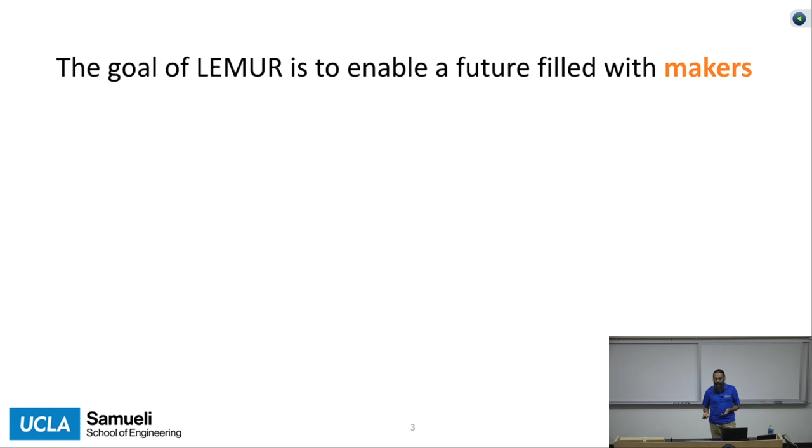We are an engineering lab, we have to do engineering research. So we talk about a bunch of specific topics that span electrical, mechanical, chemical, material science, all this stuff. We talk about the brains of robots, we talk about their behaviors, but we mostly talk about building them, designing them. That's really what the focus of my talk today is going to be: what does it take to design, to build, to create?

I have plenty of work on other stuff that I'm just not going to talk about, but if you want to hear more, feel free to contact me afterwards, stay around, throw me some questions, whatever it may be. The goal of everything we do is to make people more able to design and engineer their own solutions for whatever their problems may be.

I'll use the words robot and robotics interchangeably with engineering, creation, and making, not because I feel like robots are the only things worth making, but really nothing else is worth making. Robots are cool, they're fun, they're interactive, and really everything you could make is kind of a robot. What is a robot? It has some structure, it has some functionality. Whatever you make, we'll just call it a robot, and that way I can call myself a roboticist and do whatever the heck I want. So don't be limited into thinking about the robot as any particular kind of thing, and we'll see a whole bunch of different robots over the course of the day.

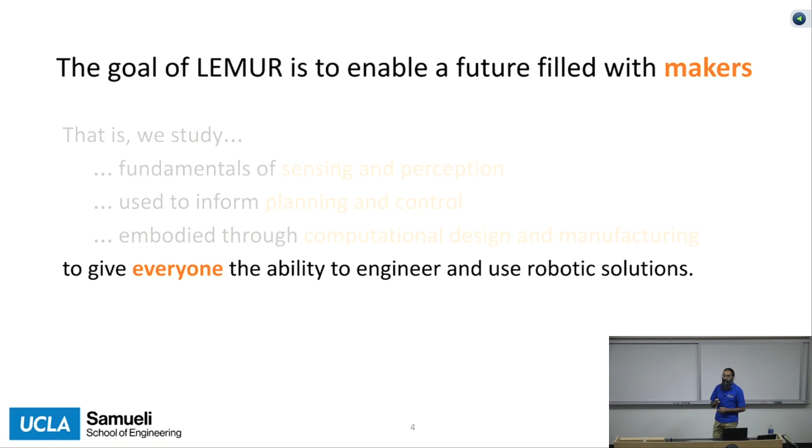But like I said, I'm going to start with that motivation. Why are we building robots? Why are we designing robots? And in fact, why in our group are we not actually designing and building the robots ourselves? Why are we coming up with solutions that help other people build robots?

Now I'm going to go into a bunch of social science research results that I did not create. I cherry-picked a whole bunch of data from the world around me. I'm also not a social scientist, so I take this information and put my own spin on it. I'm going to make a bunch of opinion claims, and they may or may not hold water for any of you all individually.

I encourage you to take a look at the data, which is numbers, and make your own inferences from them. But I'll start with a few snapshots of money. As much as it pains me to admit, we are in a capitalist society, and so money is kind of the core of everything.

We can take a look at the gap between the people who have and the people who don't have, and how far apart they are. We can think about their income gap, like how much they make on a per time basis, or if we're engineers, we can integrate it and think about a wealth gap, how much you have aggregated overall. The fact of the matter is those who have are having more, and those who have not are having less. In fact, many people have less than nothing.

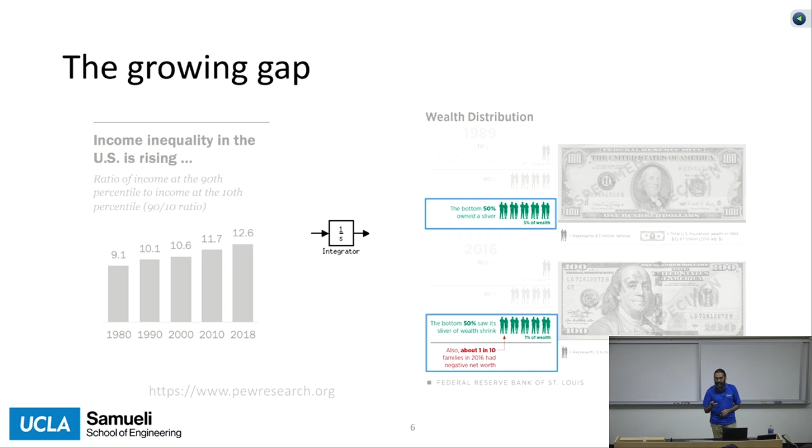And this is an issue. Why is this an issue? It turns out resources in a capitalist world map to money, and money maps to resources. One very important resource is technology. We can see this gap about who has access to what, like broadband, laptops, connectivity, all that sort of stuff. That's all well and good, but now access to technology has further follow-on consequences because that resource translates to education. We are all in a room filled with computers and monitors and stuff.

You have plenty of interactivity in your courses and your education, not only here but leading up to here. We can see some of these graphs, broken down by various demographics. The main takeaway behind these is not so much the demographic information itself, but how that is used to correlate access to technology to access to education.

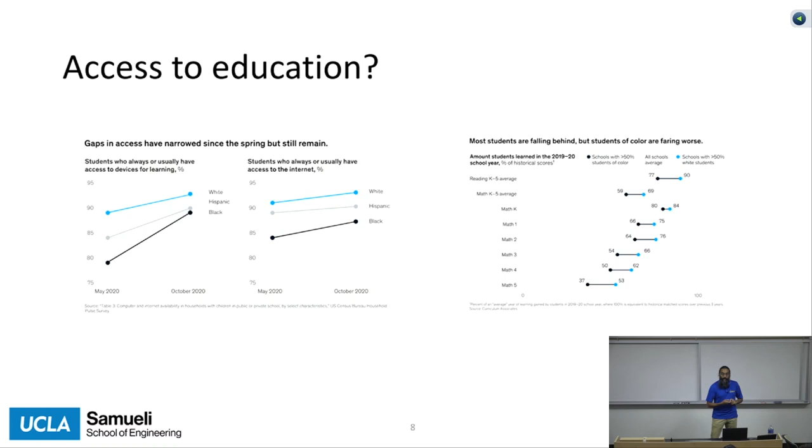So having less access to technology translates to not having the same level of outcome from an educational program, from your schooling. And things keep going from there. If you don't have access to education, that compounds. Then, not having sufficient education translates to the next generation having less resources.

This is sort of like the map from when we had a way of doing a very careful comparative study of the capabilities of education before the pandemic to the capabilities of education during the pandemic, which were drastically reduced, all else being equal. So we can see some of these trends across time.

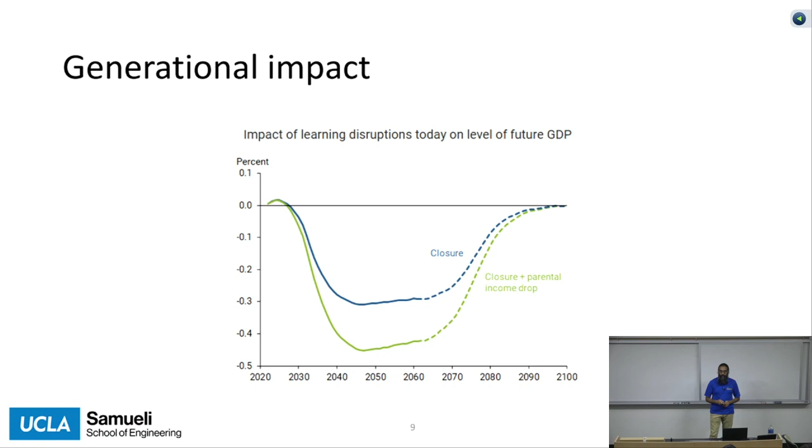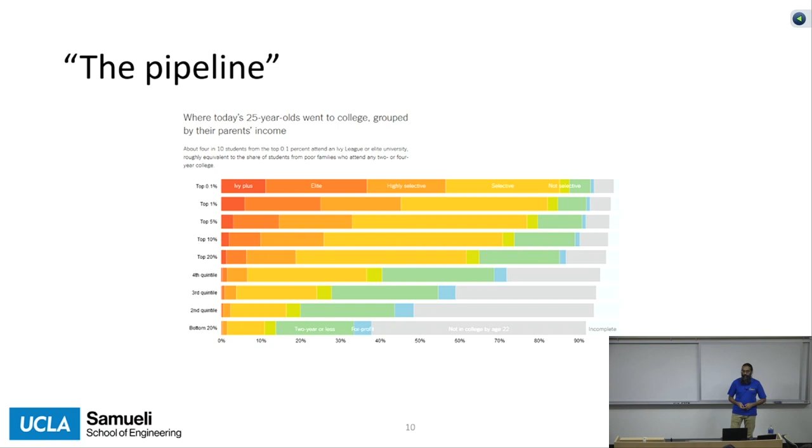And it keeps going, right? There's this idea of the pipeline, but really that translates to more education, more money, more education for the next generation. You can see how the parents' level of resource translates to kids' level of education. So we have this feedback loop.

And it's a positive feedback loop, where the word positive is again used in an engineering sense, where when you have a feedback loop with positive feedback, the signal rails out. We have this increasing separation between the haves and the have-nots. And that sucks. That's not great.

So I'll say, before I give my take on how I may try to approach this, it gets just a little bit worse in that this problem, this mapping to educational resources, and then the feedback cycle starts early. We can look at not only access to education, but then engagement in that education as well, in terms of truancy, the participation in the school process.

This mapping is very strongly correlated with income, with the resources, and it starts early. It sort of continues on. Lower education now translates to lower income later, and it starts early, as early as kindergarten. Now, I'm not going to say there's a very clear causal relationship from one to the next. There's a lot of confounding factors where there's a common origin that leads to many of these together, but nonetheless, it all comes together to see this compounding loop.

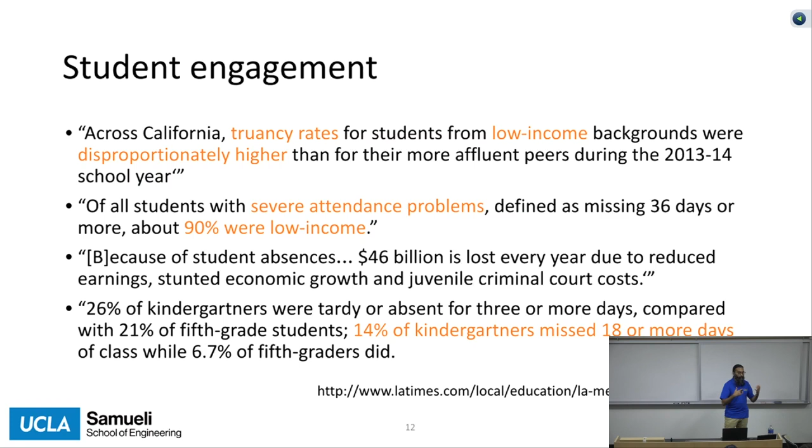And so that is kind of a dire picture. This is sort of the core of my motivation, in that I look at that and say, how can I, an engineer, go ahead and start addressing some of this? There's certainly better ways of addressing, or more comprehensive ways of addressing it through policy, through economics, through outreach, and so on.

But as an engineer, I can take a look at this one component of the feedback loop and say, mapping resources to educational capabilities, can I try to make education lower resource intensive? Can we think about what it takes to learn about engineering right now, learn about making, learn about creation, and make that more accessible to more people?

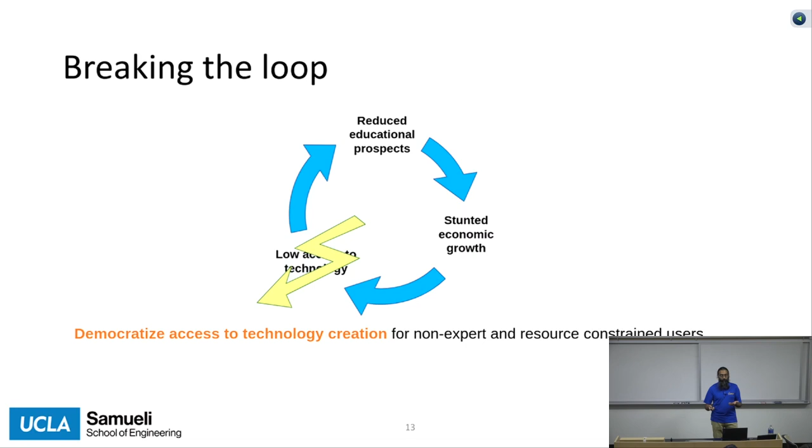I'm using engineering and robotics as a catch-all to relate to general creation, and in fact it translates down to agency. If you feel like you can do something, if you can make your own impact, maybe that'll give you the ideas or the support necessary to go on and continue with a long, productive, and happy life.

This is the broad principle. It's known in many terms. One aspect of it is this idea of the endowment effect, which is when you've created something yourself, you give it more value. You have a better connection to it, and so this idea of making translates into having a better sense of self. That's how I put all this together to say that my motivation comes from there.

But it turns out that's not the only value to the research that I do. Starting from that as the motivating goal for me, we also end up with some of the more traditional engineering metrics of performance and value. For that, I'll turn to a common approach throughout engineering, this idea of trade-offs, a Pareto front.

You can look at any two axes and say there's a trade-off between them. I took this slide from one of my colleagues' papers where they were looking at this concept of fairness. I can look at it broadly as equity or access against whatever other performance metrics we have, speed or energy efficiency or power, or whatever you want to talk about in terms of engineering performance.

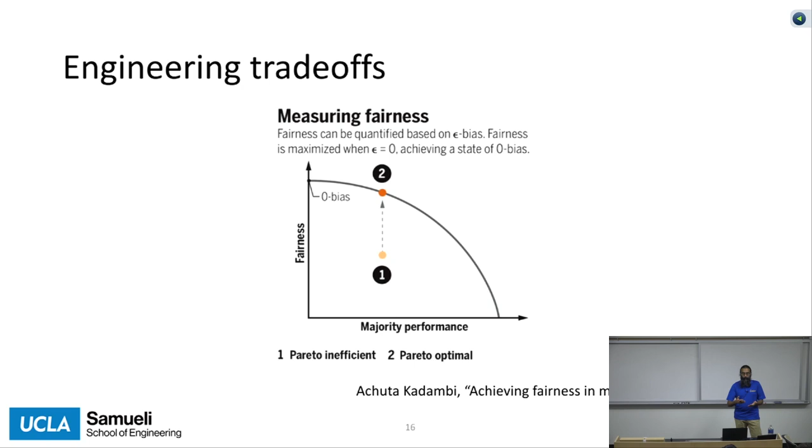Oh, and I thought I had a nice animation here, but it disappeared. The idea is that as we do engineering, we push that Pareto curve out. We increase the overall trade-off space. So if we focus on increasing equity and access, then whatever developments we come up with are probably going to improve these other performance metrics as well.

Another way to look at that is, I'm an avid GNU Linux user, and I look at the philosophy of Unix, which kicked this all off. The idea is you have individual things. You have one thing, you do it well. In the world of robotics, we've seen a lot of examples of trying to do everything.

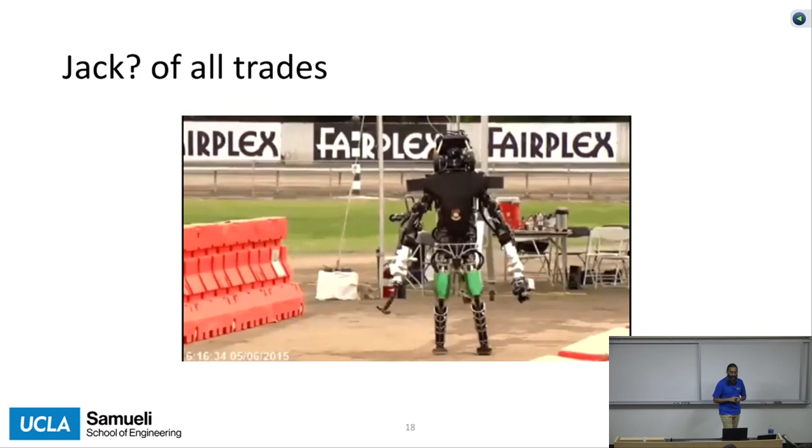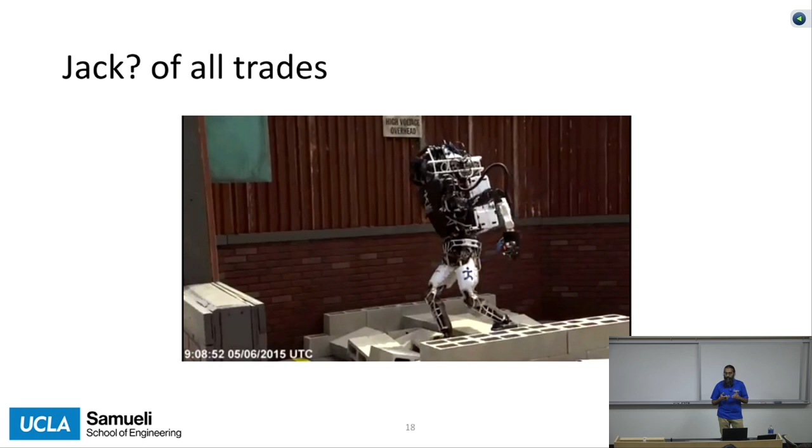Here's a video from the DARPA Robotics Challenge. It's a little dated now, we're coming up on a decade, but I don't think the right lessons have been learned from this, because we look at all these failures and the takeaway is, well, we need to get better. And we see people are certainly getting better at building these all-purpose robots. I look at this and say, why should we have a robot be able to both open a door and drive a car at the same time? Sure, we can, but we've had millions of years of evolution to get here. Maybe we should think about having one robot do one thing and do it well.

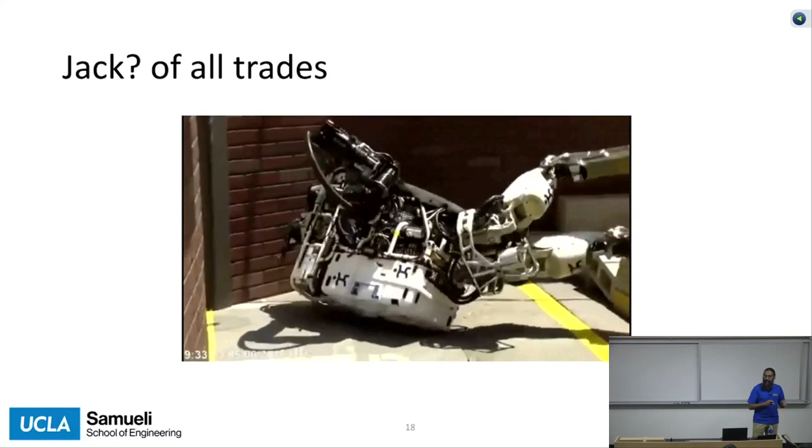Translating this back to my idea of lower resource robots, we can look back at the philosophy of Unix and this idea that part of development, part of improvement, part of getting those performance benefits out includes failure. It includes having some of these failures so that we can learn from it and try early, try often, and fix things when you need to.

Now, when you have a $1 million robot that you're trying to get to do something, you're very hesitant to have it fall over in case you ruin your $1 million investment. But let's say we develop $1 robots. I mean, yeah, $1 is still quite a lot for a large portion of the world's population, but it's a lot less than $1 million. Now you can try all sorts of random things, and you can fail. And if it doesn't work, you can scrap it, learn from it, and try again.

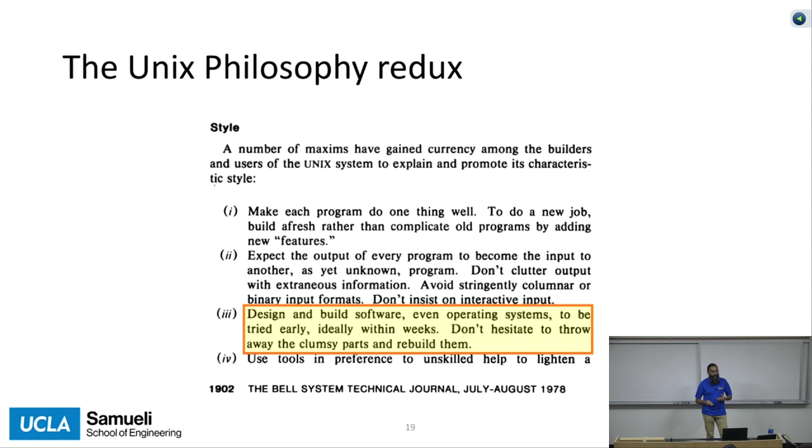So there's a lot of benefits to this idea of lowering the resource investment needed for engineering education. That's the approach that I bring to this, where if we're thinking about getting more people to build stuff, we really need to think about the creation process.

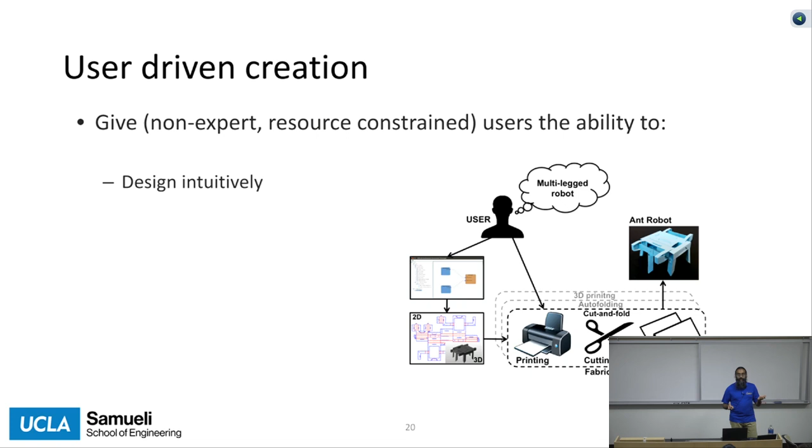Rather than think about it in terms of us, the expert engineers, we want to think about the non-expert user, maybe somebody who has limitations on what they can bring to the table. But we want to give them the same process that we have for engineering. Start with some idea and translate that idea into some intuition of how a solution should work. From there, go ahead and actually manufacture it, build it, turn it into a physical realization. Test it out, see how it works. Make sure it has behaviors associated with it, and have it try to execute the solution.

And learn from that. Whatever happens, you've generated some new insight. Go again. Figure out what you need to change, build a new system, and end up with your own custom creations, your own solutions. Ultimately, we want to put all this together - I'm talking to a crew of people from MRC, but ultimately we want to be talking to everybody. Whoever wants to create, whoever wants to build, whoever wants to design and make should have all the tools available, all the knowledge and all the capabilities to go ahead and do it for themselves.

So I think this is a good time to take a pause. That was sort of my motivation, that was why I'm here, why I'm doing everything. Are there any questions, anything that people want to discuss more, or we can jump into the research?

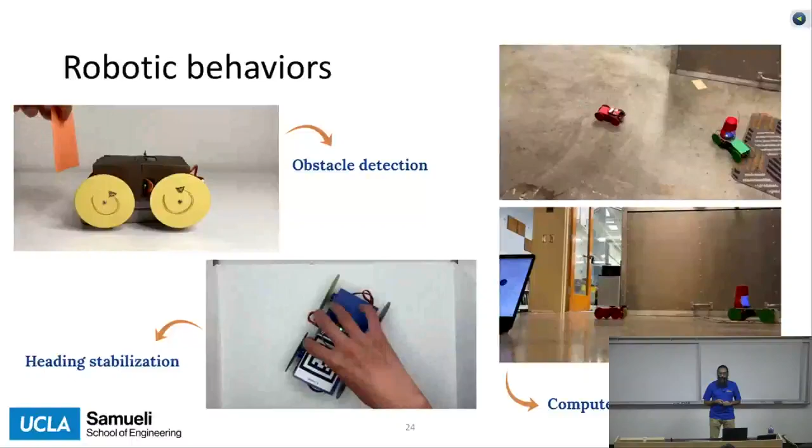So I'll start with an example. These are images and videos taken from the final presentation of a student I had for an 8-week-long internship. This was a student who was a first-year undergrad at a community college nearby, a first-generation college student, not an engineer yet at this time, and created a bunch of these tools, these robots that you see, and the behaviors they're executing. These are things that are fairly well developed, especially for somebody who's only 8 weeks removed from seeing creation for the first time. This is really what I want to get to.

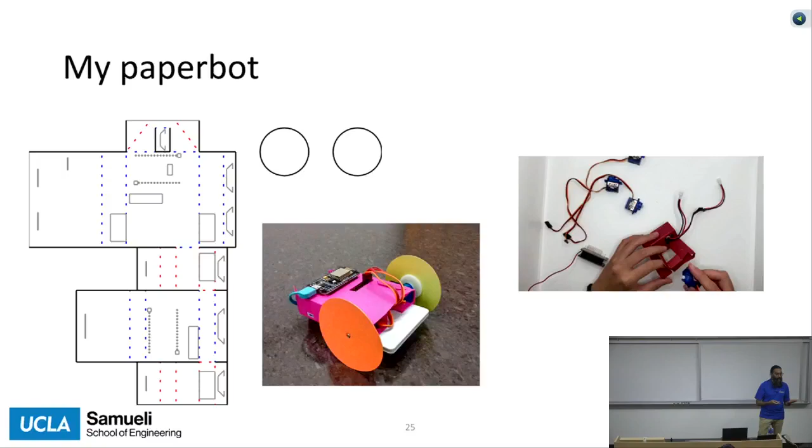How did this happen? I started with this paper-based robot that I designed during my postdoc life, and it's very cheap - I think $10 worth of materials, of which $8 are the batteries. You cut it out of paper, you fold it up, and you have this 2-wheeled vehicle. I give my students, my summer interns, this toy to start with, along with the information for how to design it, build it, and use it, and tell them to go do something else - start from there and do something interesting with it.

So that's where I'm going with this, and I'll go ahead and start going through the steps we've been doing in our lab to make that pipeline a little more accessible. Maybe you don't have to go to a research institution for 8 weeks to make that happen - you can just stay at home, and with whatever you have at home, still become that kind of roboticist.

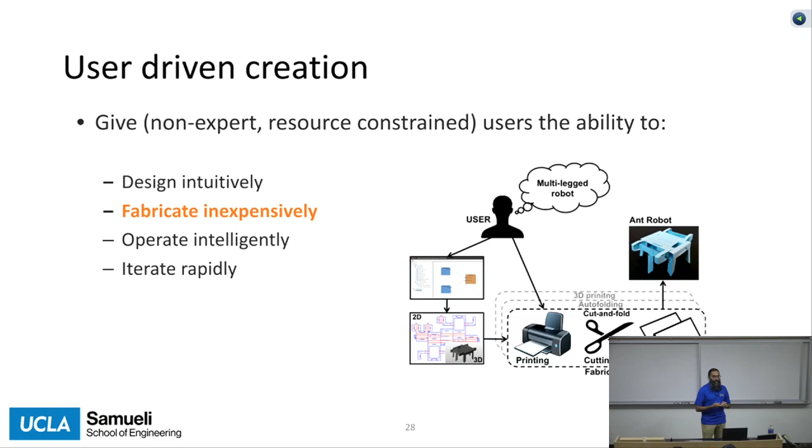So I'll start from the idea of the steps of the creation process, and start at this manufacturing step. We want people to be able to build their ideas, their creations. This idea of user-driven manufacturing - that's the term printability. This is sort of the start of my printable robot life as a postdoc. I built this vehicle where the body was made through this rapid manufacturing process where you cut and fold paper - that's what I called printable at that time. We made the body, and that was huge, because up until now you needed either a machine shop or maybe a 3D printer, but you needed some kind of infrastructure and an established manufacturing pipeline.

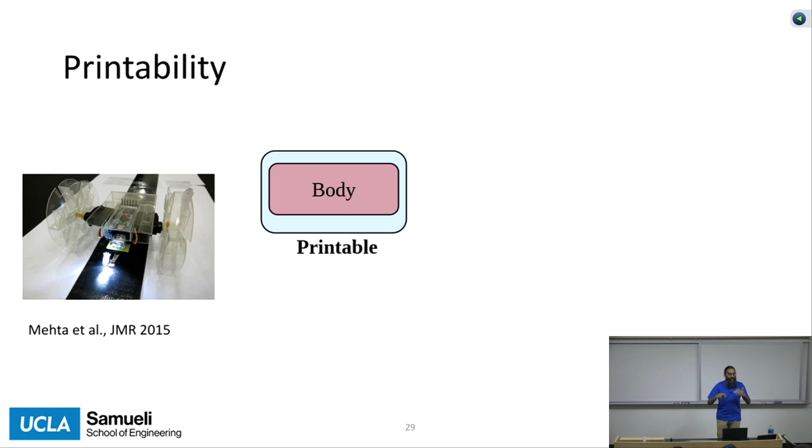Now you can do it with paper and scissors. And so that's the idea of printability. That's where it started. But it turns out a robot is much more than just a body.

There's a lot of other stuff going on. In order to be a robot, you probably need some sensing, some actuation, some intelligence. There's a lot of these other components that are necessary. There's also power. Throughout this entire talk, in fact most of our research world, we haven't really focused on the question of power. Not because it's not important, but mostly because that's a very hard problem that I don't have the background to do. But I think it's very important, and right now we have collaborations for that. If anyone has solutions or can come up with solutions, great. Let's fill out this whole story.

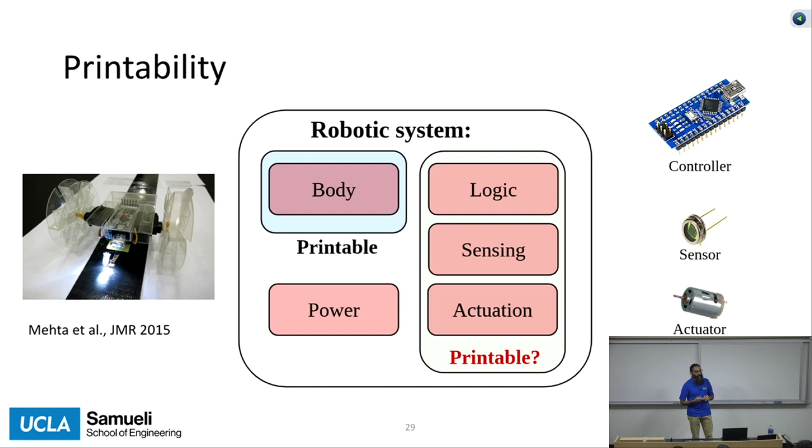But really thinking about just the brains, the intelligence, the rest of the system beyond the body, that wasn't really printable. It wasn't really rapidly manufacturable. I have to go and buy electronics, motors, microcontrollers and so on. Certainly getting a lot cheaper, but still not easily accessible. They're cheap, but you need to live somewhere on an Amazon delivery route to be able to get it, or you need some way of interacting with the broader commerce world.

So drawing a parallel to the first idea: let's start with some smart or capable material. This idea of paper, which I'll use interchangeably with a broad general 2D substrate. Sometimes they're plastic sheets, sometimes fiber, maybe wood sheets. But you have this idea of a 2D material that has interesting mechanical properties, where if you design it the right way, using cut and fold processes, like origami or kirigami, you end up with the ability to customize a solution in the real world, a 3D solution. You can quickly and cheaply manufacture things with the right mechanical or interactive dynamic properties. That was the ability we created with printable bodies.

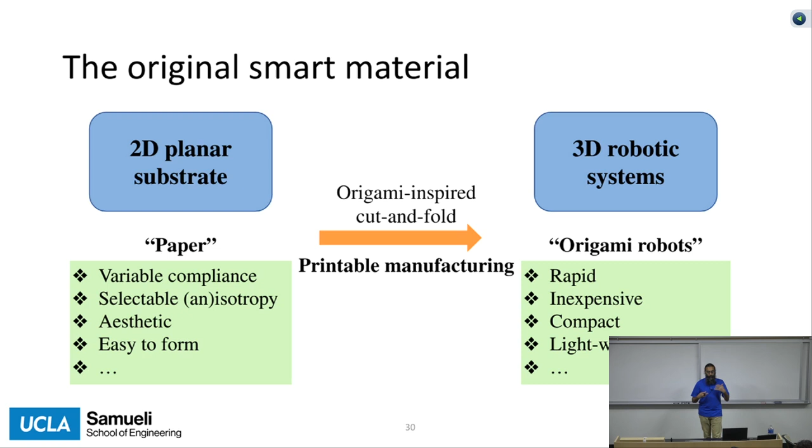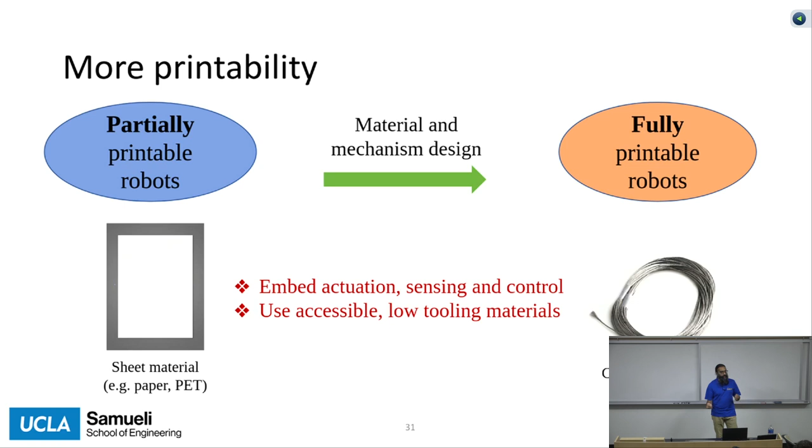If we want to extend that to the rest of the robotic system, we can think about having some more still accessible materials in addition to paper. Now we're using nylon string, in this case silver-coated nylon string, conductive sewing thread, fairly easily accessible. If you don't have that, you can take regular nylon thread and find some other way of heating it up. Through careful mechanism design, we have the ability to create these fully printable robots, using just paper and string with off-the-shelf manufacturing like scissors, tape, and tying knots. The idea is a schematic where everything can be made out of common or more accessible materials with common manufacturing tools, if you can fill in that black box in the middle—whatever that design and manufacturing process is—to realize your intelligent, programmable robots.

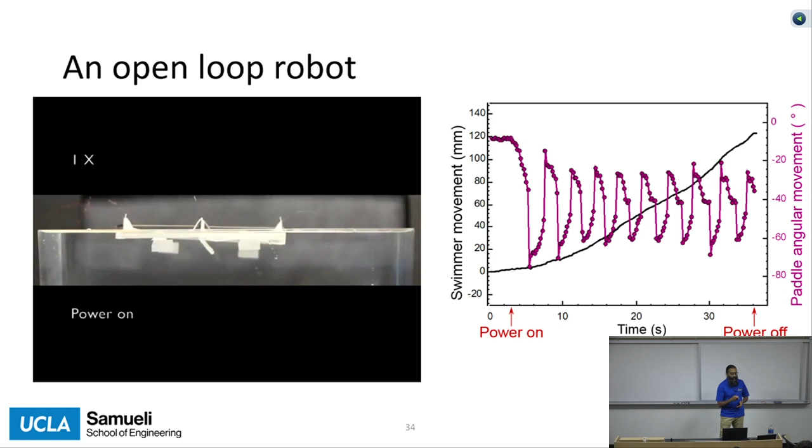Maybe not necessarily intelligent, but it's still a robot—it has active response to the environment. Here's another example, same general principle, though not entirely paper and string. Now we put little aluminum foil weights to give it a bit more motion. You can see it skittering along on the ground. Power coming in off board, but the rest of it is printable, and you have this robot driving around.

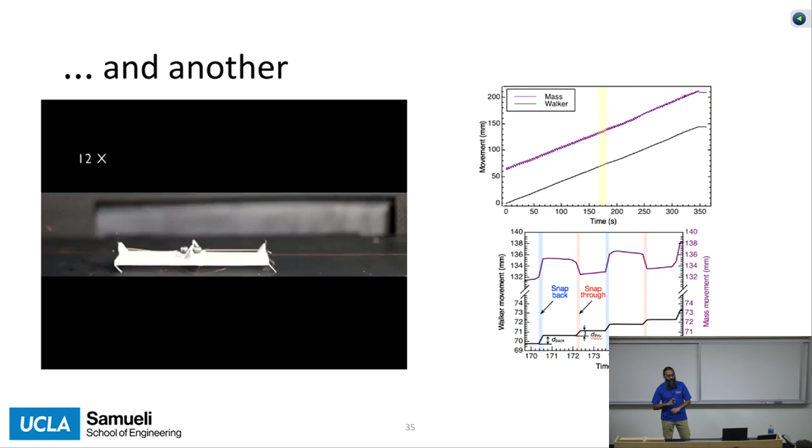Yes? What's the actuation mechanism? I'll get into that right now. Let me explain the actuation mechanism—this is the core feature of its design, of both of those designs.

It's an oscillator that moves some mechanical element back and forth. In the case of the walking robot, the mechanical element was this off-center, heavy mass that kind of pushed it forward. The swimming one had a little flapper. Those are driven by a bistable beam in the center—a mechanically nonlinear element that causes a rapid shift from one mechanical state to another. They're driven by what we're calling here a conductive supercoiled polymer actuator.

This is the nylon thread. Nylon thread, when it heats up, expands. But it turns out if you have a coil of this material that's coiled really tightly, when the material expands because of the contact forces in the coils, the entire coiled string contracts. It's like a muscle. We didn't come up with this.

This is work from a couple other groups, UT Dallas and UC San Diego, who developed this actuator. But fundamentally, you heat it up somehow. In this case, we put a current across it and it heats up, and then it contracts. So we now encase this particular actuator in this mechanism with a nonlinear mechanical element to get the driver behind these robots. Just to point out, it's really low cost.

It's folded paper and nylon string. I don't know how we got to 40 cents. That seems really high for a scrap of paper. But I think there were some scaling things we were trying to account for. If all you built was this one robot and bought just enough material for it, well, if you start scaling up the economies, you'll get even lower. But the highest cost we've come to with this is 40 cents.

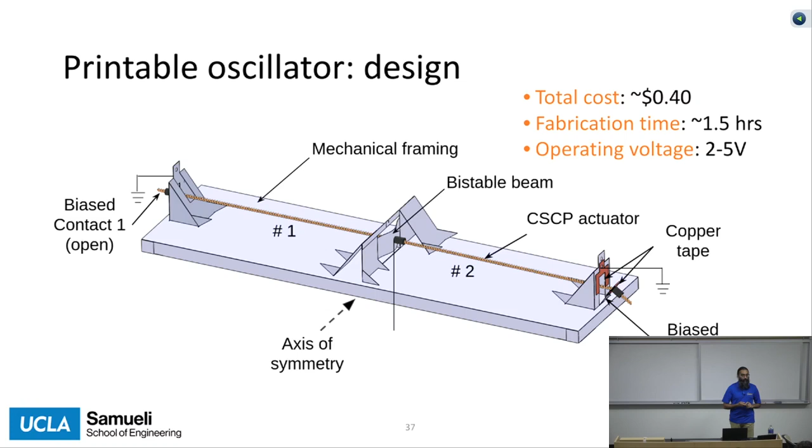Just very quickly how it works: we have these two muscles that act in opposition to each other. When one is actuated, it's pulling. With that nonlinear element, it keeps pulling until it's gotten enough force to snap all the way through. And when it snaps through, it switches the actuation into the other muscle. Because it's already snapped and has that nonlinearity, it snaps all the way through. Now the other muscle is active, and it's pulling it back the other way until it snaps through, and now we have this repeated motion.

It turns out we don't have to connect it in such a way that it just oscillates back and forth. If we take that particular core nonlinearity and extract all of the possible electrical connections from this device, we end up with a multiplexer. This is an electronic device that's common throughout the electronics world. If you build FPGAs, or designs in FPGAs, field programmable gate arrays, you may be using a lot of these as a core building block because it's a fundamental logic device.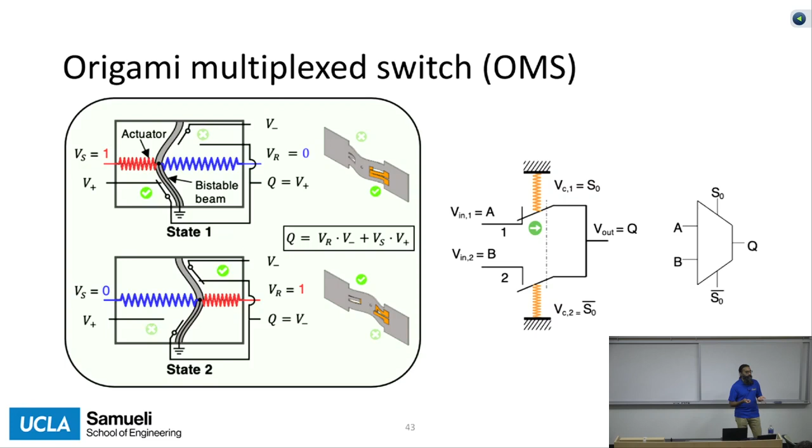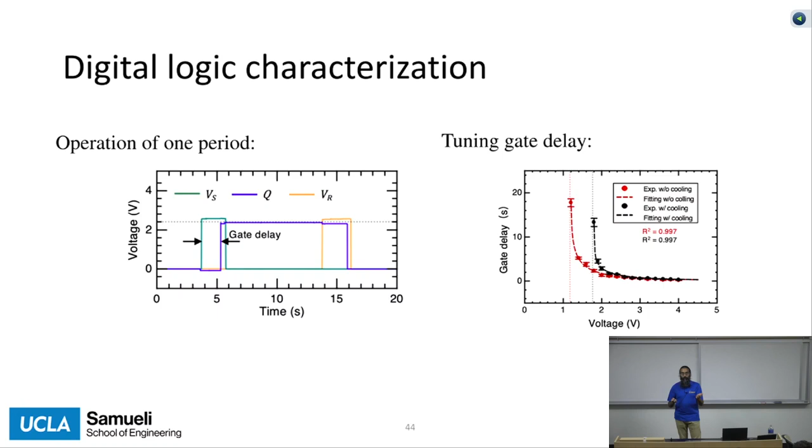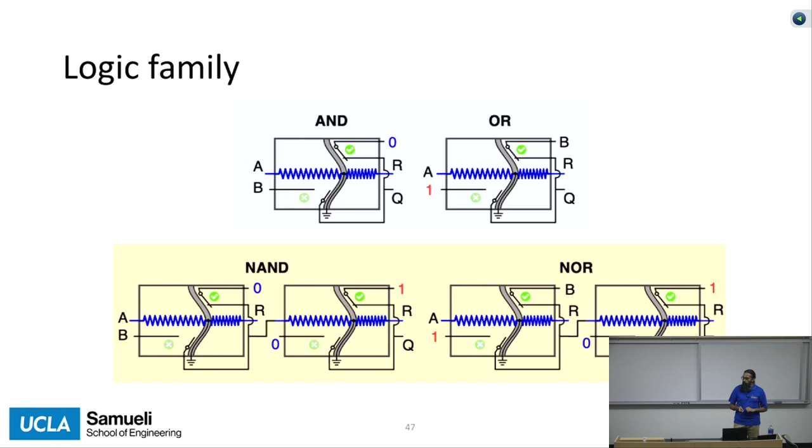It's a universal logic device. You can build any logic gate with this device. It behaves very much like a regular logic device. We can do all the characterization for noise performance and noise rejection. We can build logic gates out of this: an inverter, simple AND and OR gates, NAND, NORs, and cascade them.

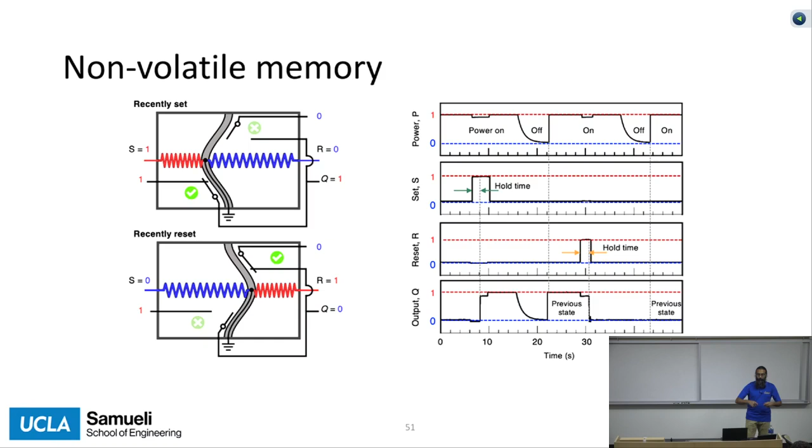We can take this thing, and because it's a mechanical element, when we remove power, it stays exactly where it is. And now we have memory. We can use this as a bit and build arrays of memories, now creating computational elements for these things, all with paper and string. In some sense, this is going back to the initial era of computers. The first computers were fully mechanical devices with gears and cogs and stuff. Now we're building it out of paper and string.

Why are we going to do all that? Because the robots that I showed you before weren't really intelligent. They didn't really have responsivity. They did one thing, and they did it well—they swam or walked. But we want some programmability. We want them to respond to their environment.

Here's an example of a device that responds very simply to its environment, inspired by the Venus flytrap. Venus flytraps are plants that eat bugs, but it takes a lot of energy to close and open, so it doesn't want to close its jaws unless there's actually an insect inside that will give it nutrition. It has sensors along the inside that will only respond if there's an active insect in it. It has multiple sensors, and they all have to be triggered in a row with some time sequence, so it can tell this is something alive, not just a leaf that fell into the trap.

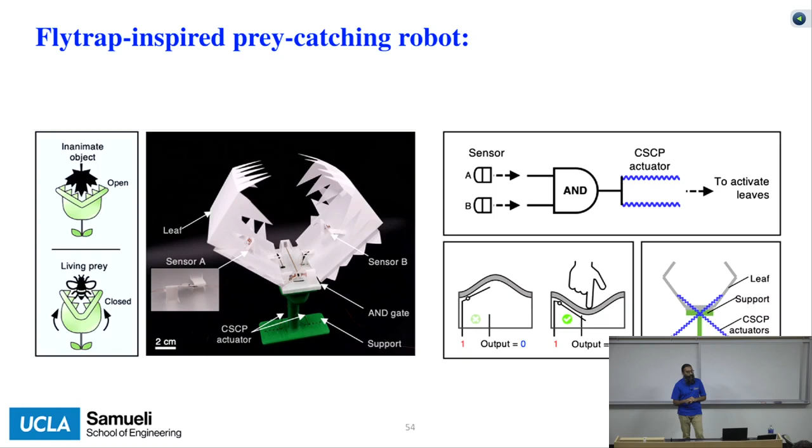We can think about this in terms of behavior: let's put two sensors on here, and only when they both get triggered will we consider it's something worth eating, and that's when we'll actuate our actuators and close up. Here's a video showing that with just one sensor triggered, it won't close. If we trigger both of them, then this thing will close up.

Now, this is a device—this robot is built entirely out of paper and string. It's sitting on a base that we glued down to keep it in place. But with just paper and string and power coming off-board, we now have this sort of intelligent behavior. It's super cheap and super accessible—you can build it with scissors and some random stuff lying around.

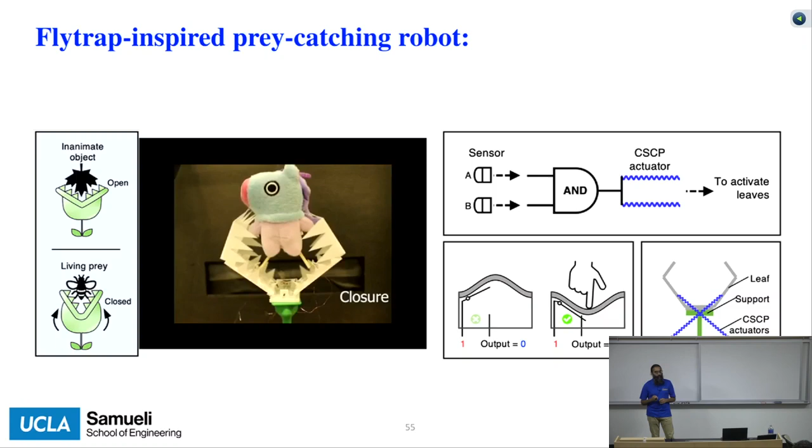Going back to the concept of growing the Pareto curve, it turns out this robot actually has some advantages over conventional robots. Now, you're never going to run computer vision on this thing—it's not that kind of advantage. But it does have advantages in terms of its robustness to various environmental factors.

If you wanted to put a robot inside an MRI machine, you can't—you can't have any conventional electronics or conventional metal parts, but you can have paper and string. And this robot works just the same in an MRI as it does on your desktop.

One of the conventional tests of soft robotics is mechanical deformation. You can step on this thing, and yeah, there'll be a few creases on it—it may not fold quite as well—but it'll still open and close. If you try stepping on your phone, it's probably not going to work quite as well after that.

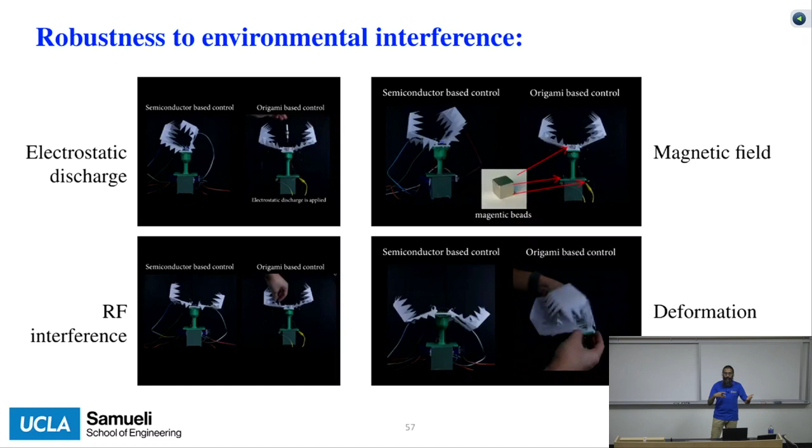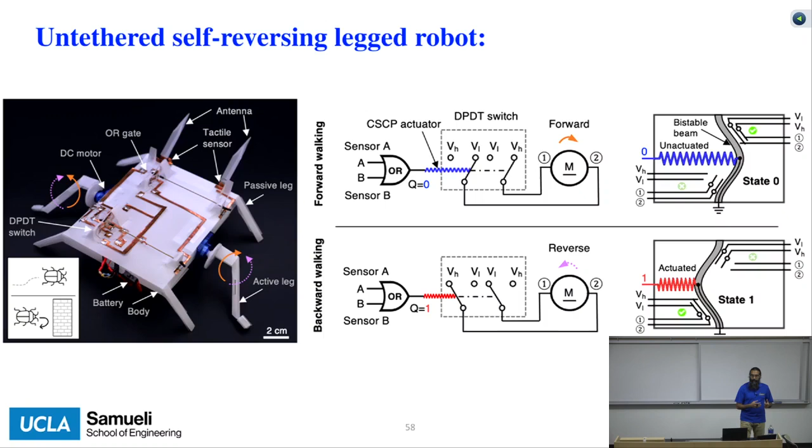So there's a lot of robustness built into this idea of low-cost materials. We can build a variety of other robots with this concept. In this case we can demonstrate some more logic, but it's not limited to its own ecosystem—you're not only allowed to build robots out of paper and string. You can throw in motors if you want, and get robots where the intelligence is still captured in the paper and string structures on top, but that intelligence is now driving regular motors that move legs around and so on.

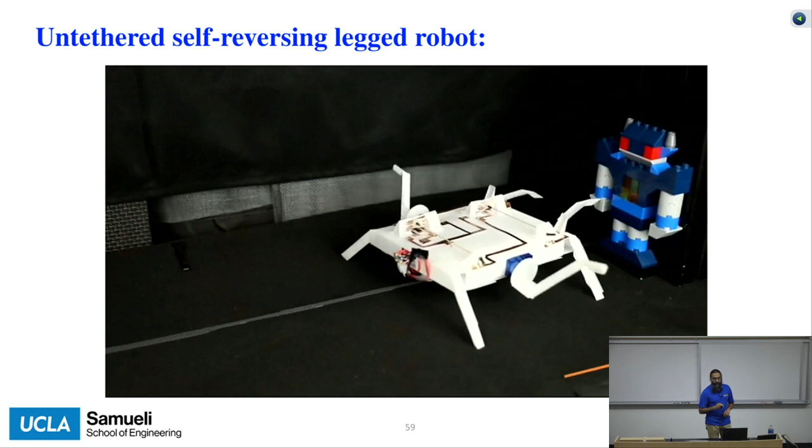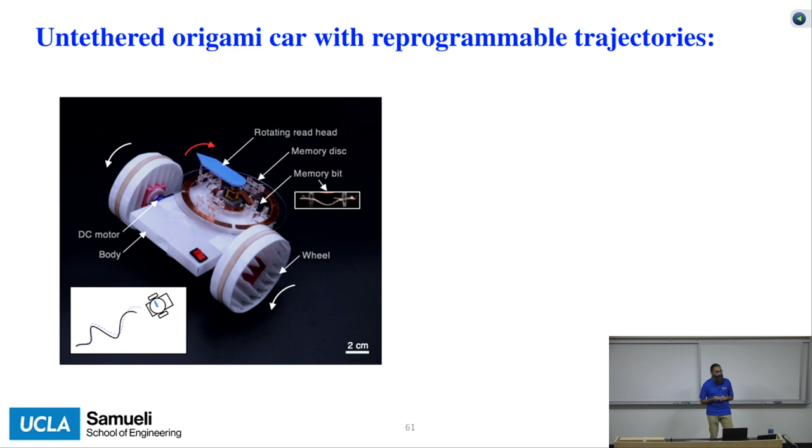You can still have sensors sensing the environment through these contact switches. We can talk about the memory aspect of these—here's an example where we built a 4-word memory bank with 2 bits per word. Not a whole lot of memory, but enough to have a vehicle we can reprogram on the fly. Back when I was a grad student, we called this method of programming GSWT—graduate student with tweezers. You go in and set the memory by twiddling little pieces of paper, and you can program this vehicle to operate on any of 8 different trajectories.

We picked the trajectories to match our home, but you can design a system that mechanically responds however you would like it to behave.

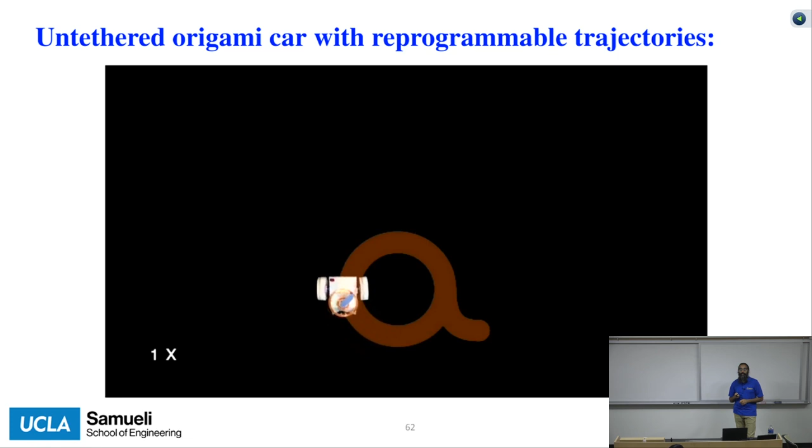For all these example robots, we focused on the conventional robot design process, where you have a body and a brain, and the brain drives the body through some interactions and program behavior using electronic circuits.

But it turns out if we have control over the building process, where we can build things out of our own materials, we can think about a different paradigm where the materials themselves have the behavior programmed into them. We're calling this mechanical intelligence, though there are many ways of describing it. The idea is to create a metamaterial that is programmable.

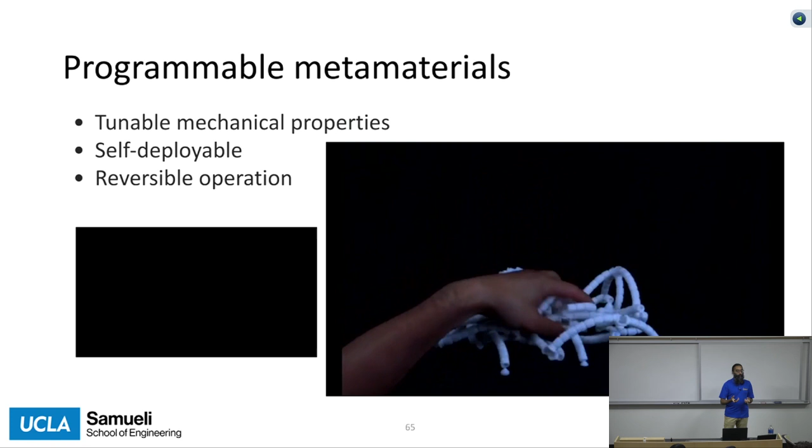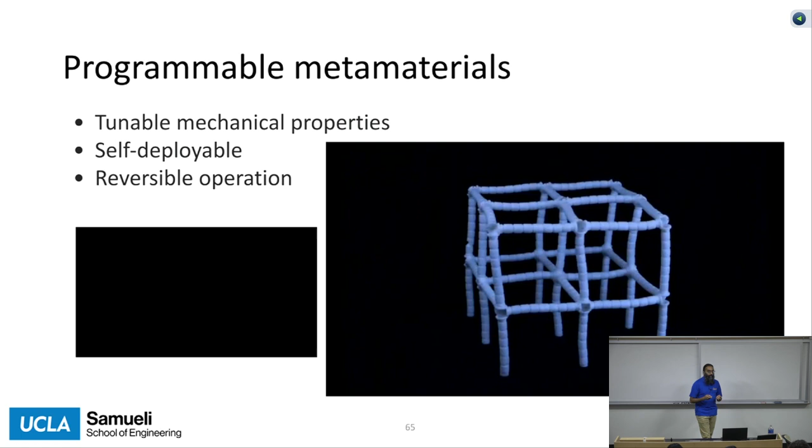In this case, we're trying to consider the programmability in terms of its mechanical structure and its mechanical properties: stiffness, strength, and damping ratios. By actuating it, or by finding some way of driving it, you can change its mechanical properties so that the material itself can behave differently. And maybe we can show ways of turning that into a robot.

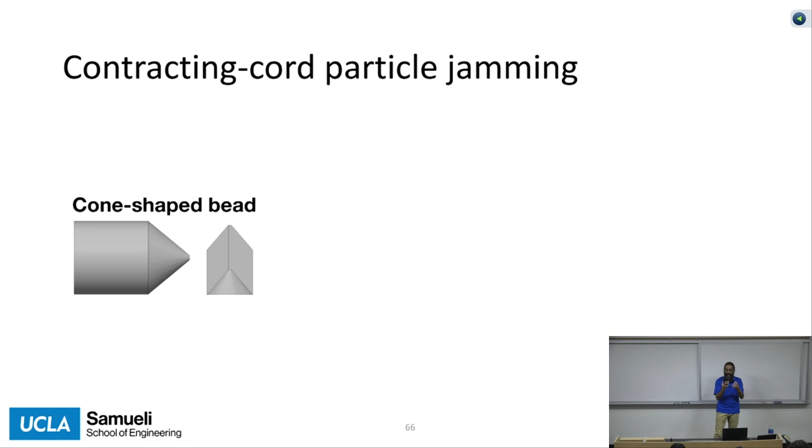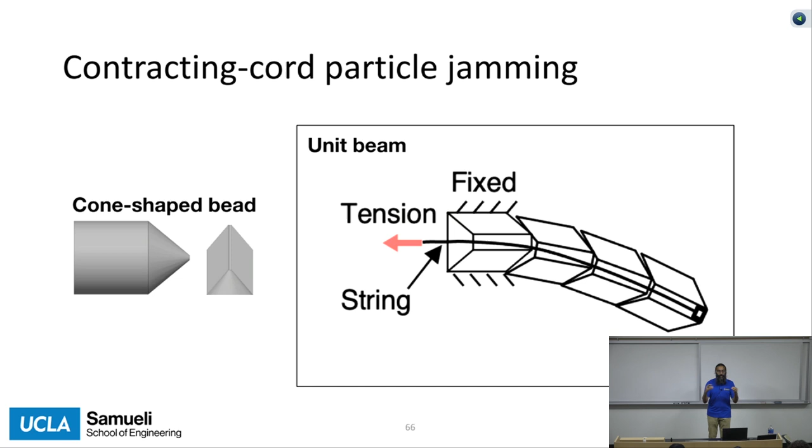Just as a point, you may have seen this kind of idea with a push puppet. It's a toy that's been around for probably a couple hundred years that uses the same principle, particle jamming. You have a bunch of beads shaped so that they nest and interlock with each other, threaded along a string. By changing the tension of the string, pulling on it, you change the behavior of that collection of beads. You can change its stiffness and other mechanical properties.

You can actuate this conventionally. You can say, let's put a motor on it and use the motor to wind up a spool, and that pulls the string, so you can go from some super floppy bar to something that has some rigidity.

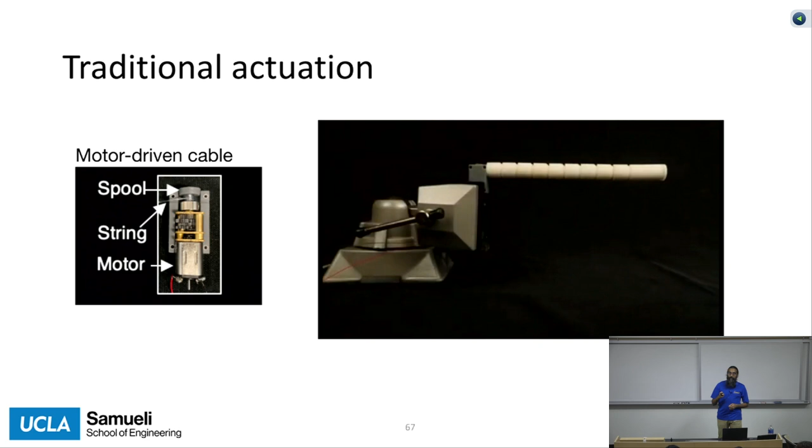You can try some of the other things. Like that same actuator we used in the paper robots, this nylon thread, it's a muscle. You can use that to pull the string tight and actuate it with electronics. The nice thing is it's a thermal actuator, so you can actuate it without electronics—just put it in a hot water bath and it'll actuate. So now you can think about having the actuation directly driven by sensing from the environment.

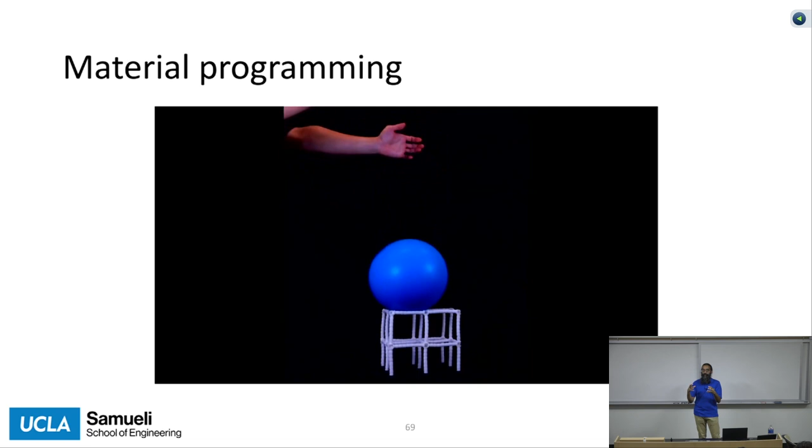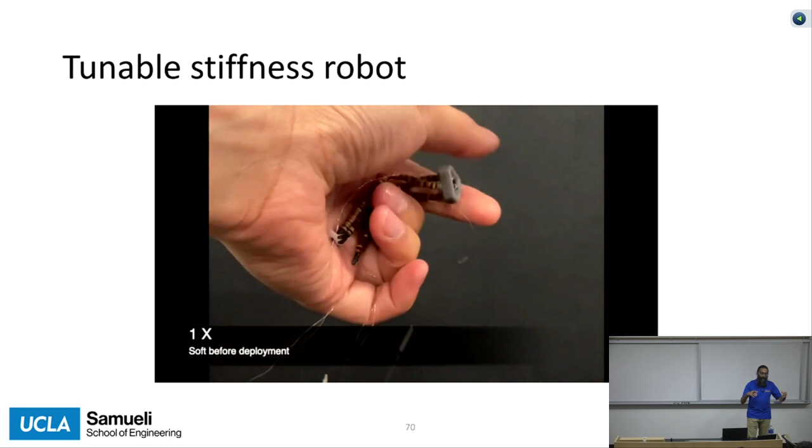The nice thing about this is it's programmable through the tension in the string. Here you can see we have a block of matter, and you can change how stiff it is—does the ball bounce off it, or does it get caught in it? That's sort of an academically interesting case where you have the stiffness in a block, but that's not enough to get us a paper out of a prestigious journal. What we can do is turn it into a robot.

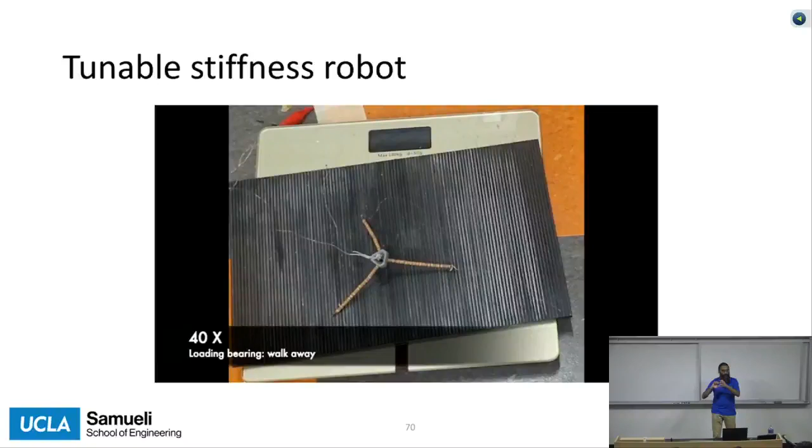Now the interesting thing about this robot is it walks. Very simple robots that we're building because we're exploring the space. But the neat thing is it's a single degree of freedom actuation—the actuation is changing its stiffness. There are no actuators moving legs or anything like that. It's just going from a super floppy robot to a super stiff robot, a mechanical structure, and we can use that to walk. Same general idea behind most soft robots: it's very robust. You squash it, twist it, crumple it up, and it still keeps walking.

Now, why do I say this is intelligent? Maybe intelligence is a bit strong, but because you're controlling this thing with its stiffness, it doesn't need to actually know about its environment—it conforms to its environment. So you can go through tunnels and under bridges, and it doesn't need to do anything. We just make sure it's soft enough to get through these things, and then as it changes between soft and hard, it walks along.

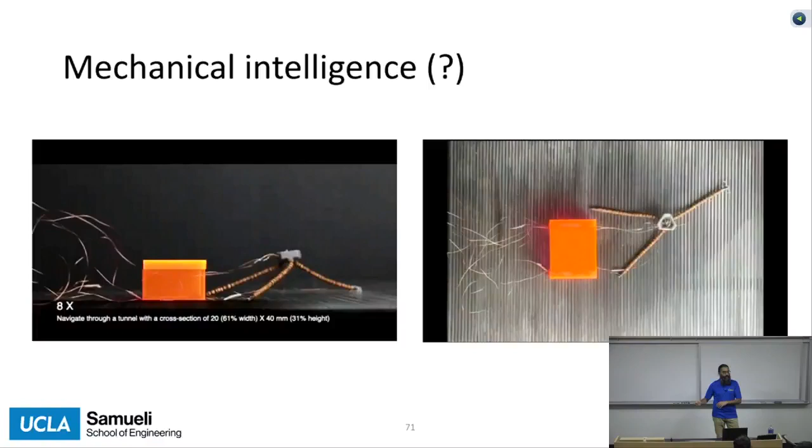So these are some of the recent results. This is, I guess, another element of building low-cost robots using string, and in this case beads—not necessarily made out of paper, although we could. I don't know, I've not tried it. But again, using simple materials, simple designs, simple processes to come up with interesting behaviors.

Now, I say using these things to create—there's a big gap in there. That word 'using' is doing a lot of heavy lifting in that statement. You need to know how to use these to do it. And right now, all of those robots and designs that I showed were built by my graduate students—people who've had years of education at prestigious universities, getting the kind of background needed to be an engineer today. We'd like to make that not as onerous.

So now I'll get into the next collection of stuff we've done, this idea of computational design—taking the knowledge we've developed as engineers going through school, wrapping that up so that other people who are not engineers, who haven't gone through the same schooling, can still use all of that to do this kind of creation.

This is the design phase of the creation cycle. Now, the reason this is challenging is because when we talk about robots, we have a lot of intersecting domains: mechanics, electronics, thermal, optical, who knows what other parts go into all of this.

And if we wanted to figure out how these things work for real, we have to use complicated, sophisticated numerical analysis programs where just figuring out how to run the program, maybe even how to install it, means you probably have to be in a PhD program somewhere. And then you get results, and you definitely need to be in a PhD program to understand what those results even mean.

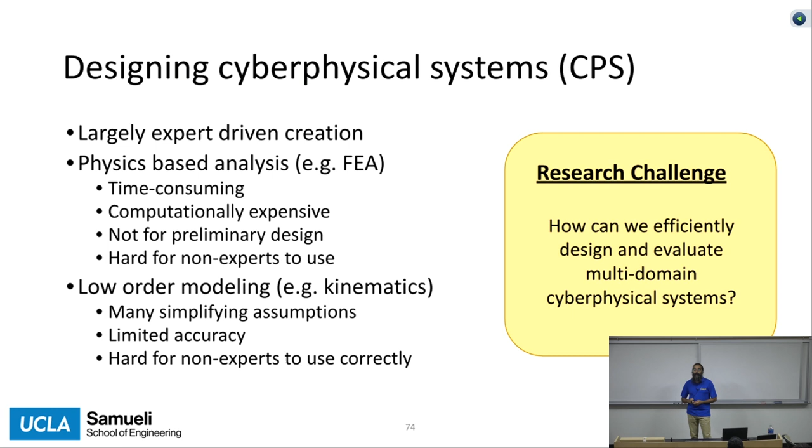So we have this sort of broad question, which is: what do we do? How do we bridge this gap and make it so that we can understand how these systems are going to behave? When I say we, it shouldn't be us. It should be people who are not in this room today.

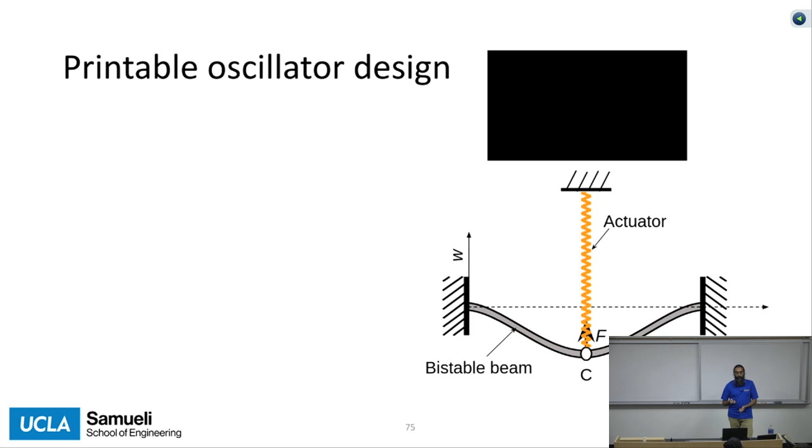And so we can use as a surrogate case the printable oscillator, the paper and string core behind the swimming and sketching robots, and say, well, at our core we have this actuator, this coiled muscle, and a nonlinear element, which is this bistable beam, and we want to see how it interacts. The actuator heats up, generates a force, pulls the beam, it needs to flip through, and we have this cycle.

It'll give us some period. The functionality that we prescribe, the thing that we need, we say we want a robot that swims and it should be flapping 4 times a second, or we want a robot that walks and takes 10 steps every second. There's a period. An oscillator is pretty much governed by one parameter. So the design process is: let's get this parameter given the geometry of our structure.

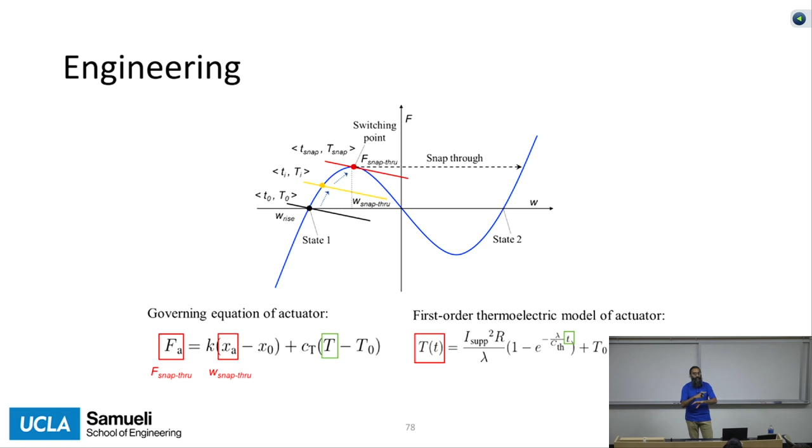Well, how would we do that today? We take some equations that just say how these things work. We're going to throw in some approximations and some physical relationships. We will figure out when we can use approximations and how we can connect these two domains into a single domain. And great, in that 3 slides and about 3 seconds, you've covered 1 PhD's worth of work to get this equation. And now you know how to get a period, an oscillator with a given period, given the geometry.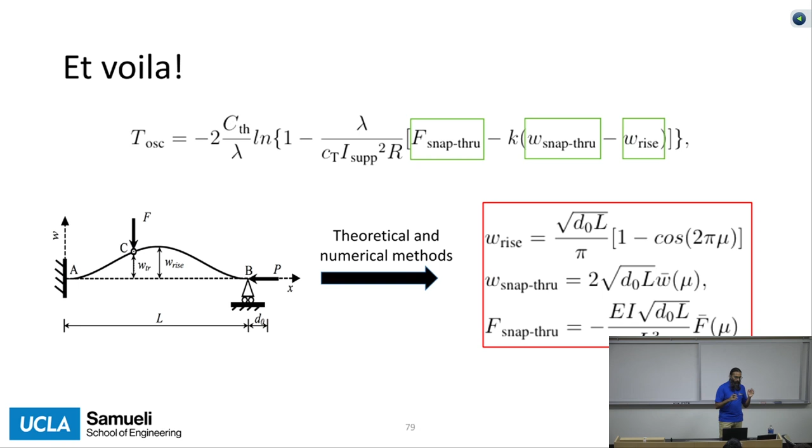Right? Not really. That's complicated, and I don't expect anybody to understand what's happening in this equation. I don't understand what's happening in this equation. But the nice thing about this equation is it is an equation. It is a very low order, relatively speaking, equation that has a relationship that we can now throw into a computer.

It's a constrained optimization problem, which numerical solvers in MATLAB or Python or in a number of other free and open source products can just solve instantly. And so we can formulate all this.

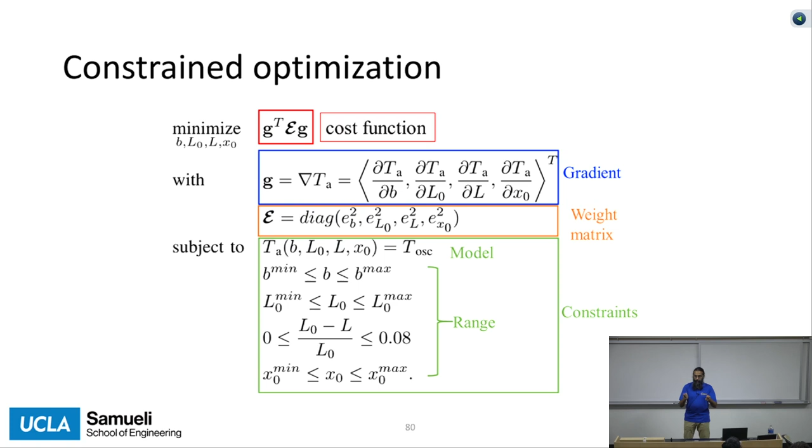And now that this has been formulated, we don't need us anymore. I don't need to be there and my student doesn't need to be there to figure out how to do this, you throw it into a computer. And the computer will say, you need to have a muscle that is 12 centimeters long.

Now, that's the muscle part of it, but it turns out the robot, remember our high-level schematic, has more than just the muscle. There's a body, there's sensors, there's actuators, and we can take all of that put together and do that same kind of modeling. Take each subsystem, figure out its constituent relations, the math and physics that goes into all of this, figure out how they relate to each other, and throw that into one big mixing pot.

We can have things that are not just geometry, but discrete choices, like do you want a different set of actuators? We use actuators that are made out of nylon because they're cheap and disposable. But if you wanted to, or if you had access to things that are made out of carbon fiber, you can get ones that are much stronger.

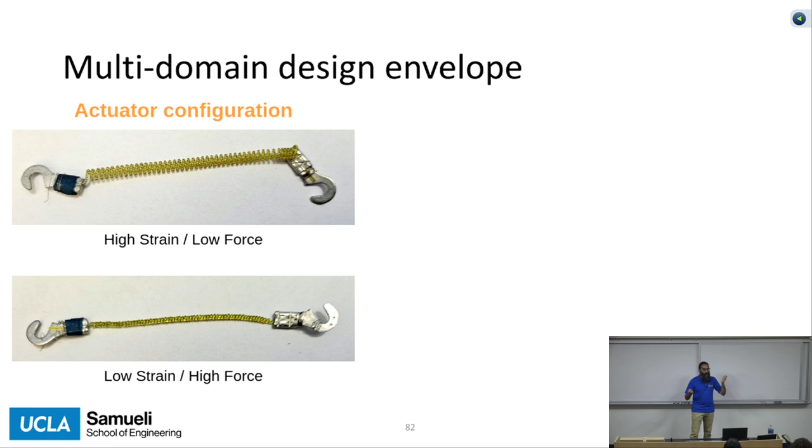We use paper, again, cheap and disposable. You can cut it with scissors. Maybe you have some other materials lying around, some plastic sheets or whatever else. You can throw in some discrete decisions there, and put all of that into one big giant mess through that design framework, and come up with some analysis tools, sort of like a snapshot of a graphical front end.

I'll say right now we're not so much into the user interface development phase just yet, so you still need to kind of know what you're doing, but you move sliders around and you see how that changes its behavior.

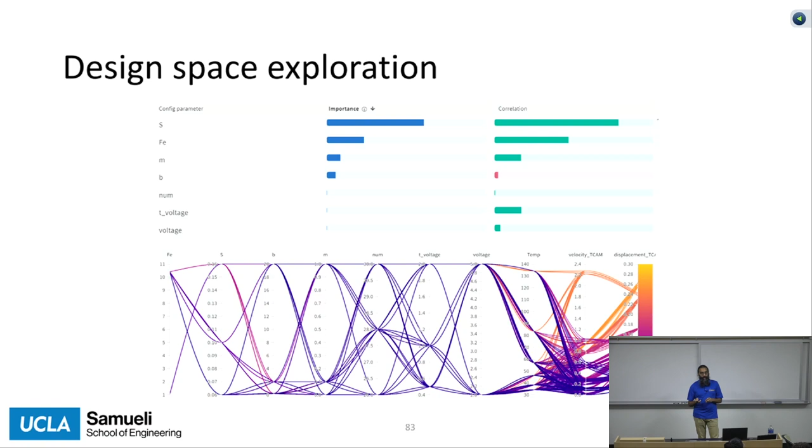And you can play around with it and say, all right, here's a behavioral point that I like. This is the kind of design that I want. How does this robot translate into motion? We'll give it an impulse and see, does it roll around?

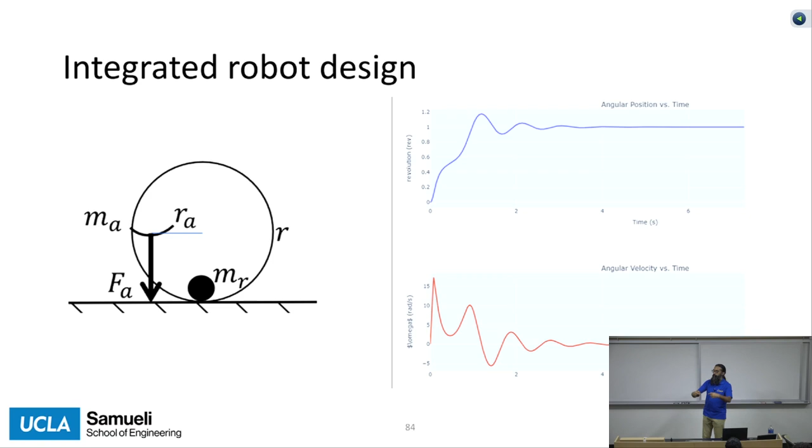This idea of using the snap through instead of having a little flipper, push it on water. We have it drive a plunger that causes the cylinder to roll over. We say, hey, look, it works.

After playing with the numbers, we get it to start rolling over. We can generate a manufacturing design for it. We can go ahead and build it. Realize, oh, hey, it doesn't actually work. When we hit it with an impulse, it goes maybe almost halfway, but then it rolls back.

Maybe that's because we didn't cut it quite so well, because it's been a long time since I've been in kindergarten using scissors. Or maybe it's because I'm not an engineer anymore. I teach and I don't do anything useful.

But now we say, all right, well, maybe if I had two, one on each side, I push it a little bit halfway, and I use another one to push it again. And we can try this one, throw it back into the mix, do some more analysis, right? We get that iteration part of it. Very low cost, everything is cents worth of material and so on. Doesn't work, recycle it, try again.

So that's the design process, and I sort of demonstrated that on this paper and string robot, but we're not actually limited to paper and string robots.

That's certainly very, very interesting to me because now we're sort of closing the loop on that design pipeline in terms of low cost. But if you have a traditional robot where you build a body out of plastic, wood, or metal with conventional subtractive manufacturing materials, or maybe additive, you throw in a 3D printer there.

You have a brain that's built on a circuit board where you get discrete components and solder them in, or get modules that are integrated circuits and program that whole thing. You run code on it, and you have sensors that are transducers that you buy from DigiKey and solder them on and have it drive around and do stuff.

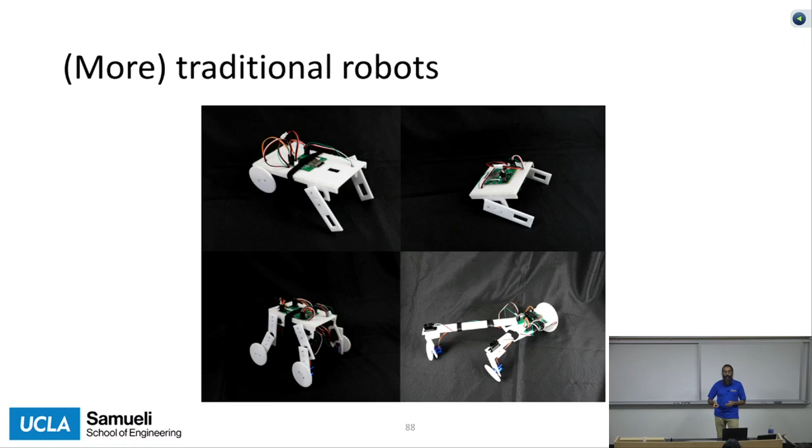Well, you can throw this kind of integrated process onto it as well, and you have these pipelines that used to be very separate, where you have an electrical engineer figure out what controls you need, and then a computer scientist program those controls, and they're all put on a body that a mechanical engineer designed, and you turn it on and nothing works because nobody talked to each other.

So now you have to go back to the design loop and say, all right, well, turns out you need more horsepower to run this computing algorithm. But that means now you need a stronger leg to hold up the extra weight of the battery that it takes, and all this stuff.

We can wrap that up into a single design process where you feed in a set of goals, a set of behavioral objectives, and it will farm it out to a bunch of different tools that we've created over the years in our lab.

And I just realized when I was putting together these slides a couple days ago that we didn't actually name this integrated tool, so we should probably come up with a good name for that.

But it parcels together circuit design and mechanical body design and some amount of control system design, and loops that all up and gives you this sort of design tool in the middle that doesn't require an engineer at the beginning.

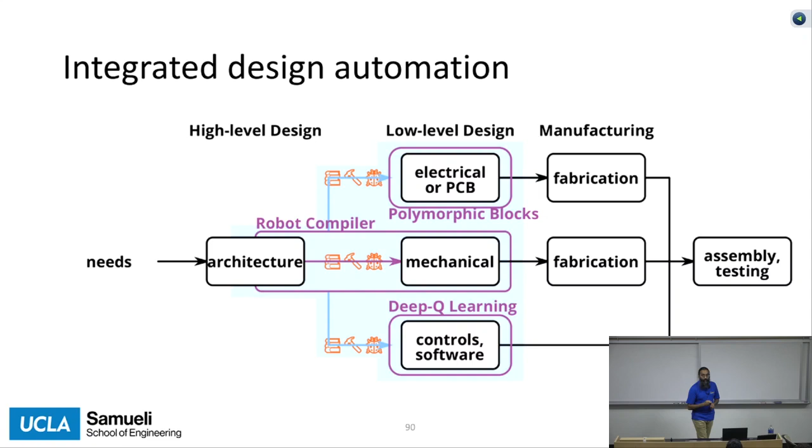Okay, so in the last couple minutes before I leave some time for questions, I've given snapshots of where we are, and I've been hinting along the way as to where I want this research to go and where I think the important next questions are. Broadly speaking, we can take this back to my motivation and ask: what is making it hard to be an engineer today? What is making it hard to create? I've pulled out three points that I think are relevant, but there are many, and you may have your own experiences and connections to people not in this room that give you your own thoughts here.

We started with the low cost. We're capitalists, we need money. Can we get the materials we build things out of to be cheaper? But there's also access to infrastructure. A 3D printer may make things out of a few dollars of plastic, but the printer needs consistent electricity, access to repairs, and materials that can be delivered by Amazon.

So there's another layer on top of cost: connectivity to the global economy. And then there's this big gap of knowledge of what it takes to use all of these things to get to where you are. I've given this framework of using low cost materials in an integrated process that in theory we can do with just scissors, tape and knots. Mostly the robots we've built use higher grade engineering manufacturing tools, partly because fundamentally they are a little bit finicky, needing some amount of precision in manufacturing.

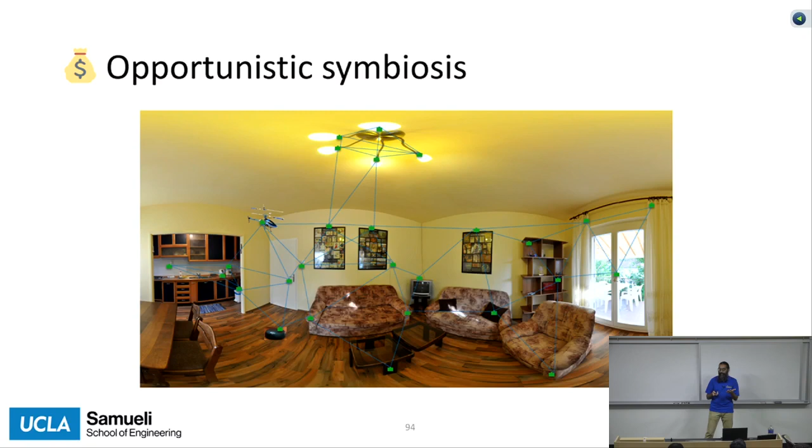This whole idea of expertise - I mentioned we're not really big into user interface design yet, but we'd like to be. The tools used right now have sliders that move across and change numbers on a graph, and you need to figure out if that makes your robot work or not. What if we could get the user more directly involved in a more intuitive way, perhaps using augmented reality systems? They're coming down in cost but still ridiculously expensive, which goes back to the question of infrastructure. But maybe there are other things we can do to more immerse the user, the creator, the designer, into the world of engineering so there's a bigger connection to what the resulting systems are.

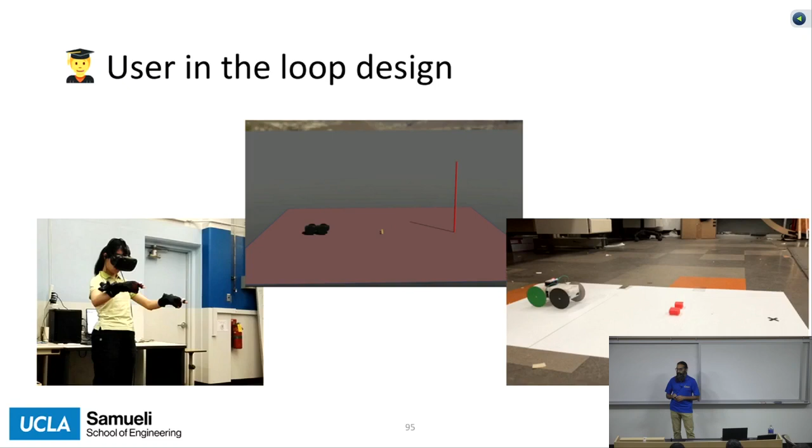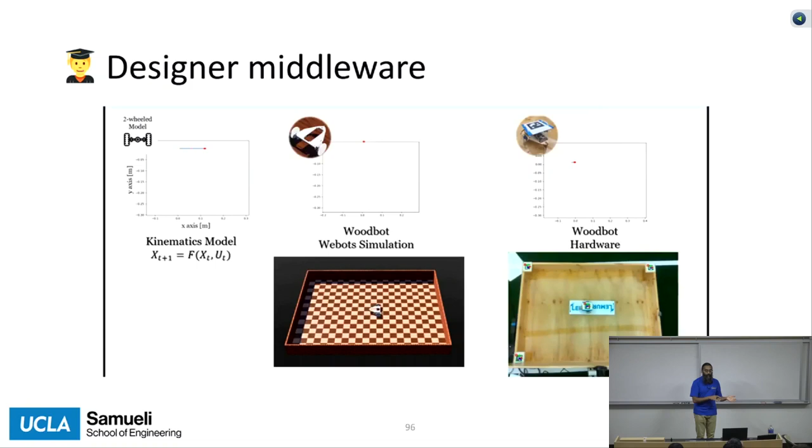I've framed it all as what it takes to get the designer, the creator, to make their final product, but we can really think about exploring that link. We call this a middleware. It sits between the designer and the design, and lets you explore the consequences of various decisions you make. You can explore it at the simple model level, through simulation or finite element analysis, into the real world, and try to bridge all those connections - not just to make the design work, but to build your design intuition so you can become the kind of engineer that designs directly.

Because ultimately, where we're trying to get to is this idea of something that sits between the designer and the design - a tutor, an engineering instructor, some system that involves all of our current aggregated knowledge and uses it to help the user create the robot they want to create, in such a way that they learn from that process, they become their own engineer, and later on they can be their own roboticist. They can come up with the ideas, implement them, and deliver these solutions out to the world.

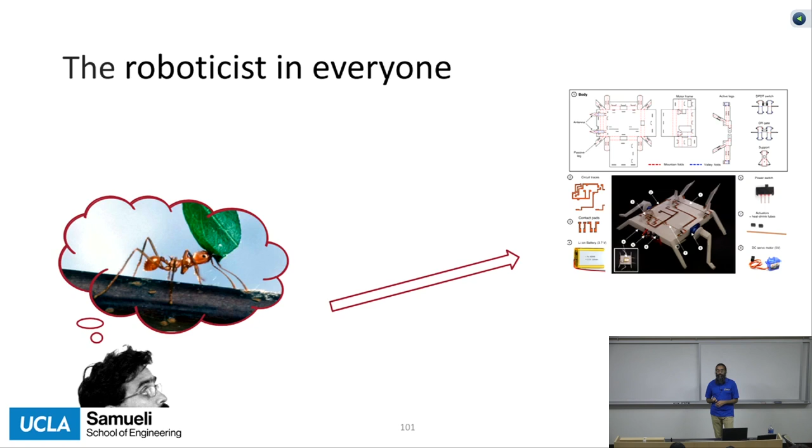So you've all been a very attentive audience. I hope I've kept your attention till now, but now let's flip the story a little bit, and I'd like to hear from you. Did I inspire something? Are there any questions? What is it that we can do together as a collection of engineers to go ahead and bring engineering to everyone else?

I do have a question about what designs you found are easiest and more robust. I'm thinking the crab is potentially a little harder to build than say the walker. Do we have access to those plans? Are they on your website or something?

That's a good question. I'll answer the second part first. We have them all in Git repositories somewhere. They're not aggregated on our website. We should do that. This is one of the challenges, and I'm gonna flip that on all of y'all. So blame him, not me.

Be very good about documentation, because later on you're gonna be talking about something you did, and if you don't have it documented, then you're gonna have to give the super awkward response like, well, yes, in theory somebody could do it, and the whole reason we did it was so that somebody else could do it, but not quite yet because we don't have all of it aggregated together with nicely laid out plans.

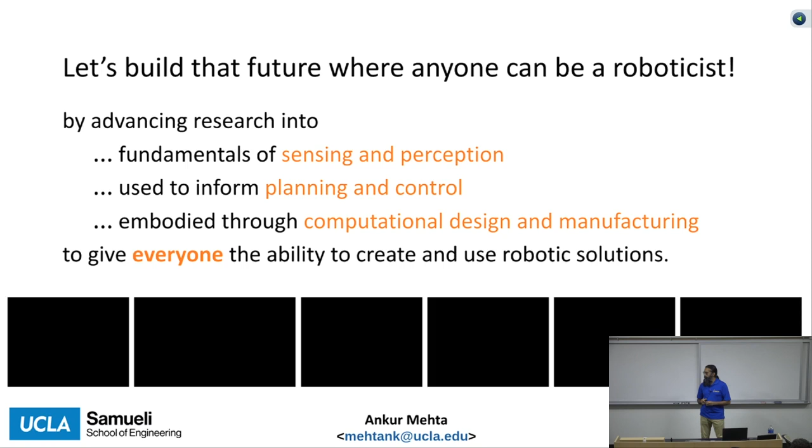Excellent, because I think we've all learned what can be done with paper. I'm just kidding. You should use this to hold those. Awesome. But thank you so much for coming, and thank you all. I'm glad to have had this opportunity to talk to you. All right.